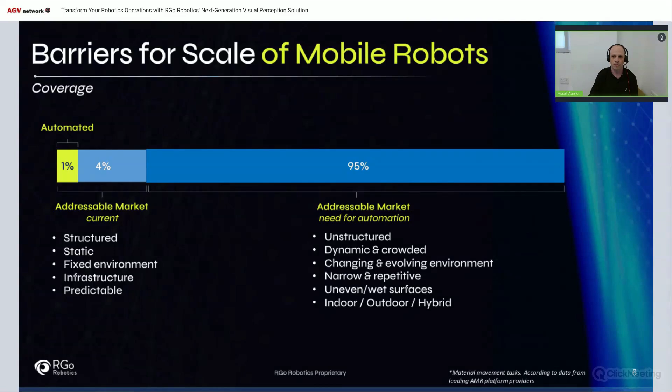And then you also add to that indoor, outdoor, and different surfaces, and you realize that the coverage of current systems is very limited. So the first problem we'll try to solve is coverage—making autonomous systems operate anywhere, anytime would unlock the first step into making this market addressable. With that, the second problem will be adaptability. Those two together basically build the coverage. Improving the availability of systems and improving their adaptability means they can now cover all the different sites.

The next challenges that we have are the commissioning times and the long time to market. So once you've solved the availability and coverage, as I said, you still need to talk about the scalability of the solution that you have—how easy it is to use it and how easy it is to deploy it.

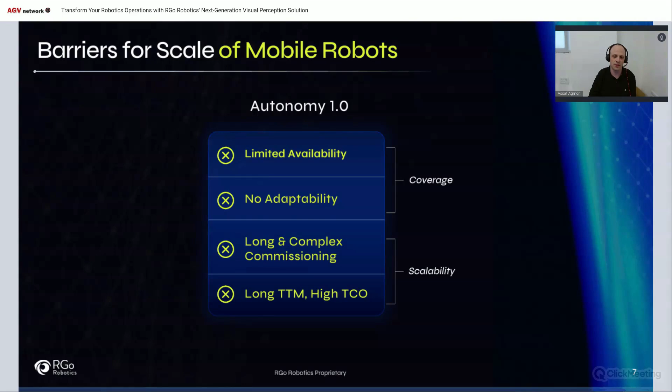And what RGo does, and we're going to go into the details today, is how do we move from autonomy 1.0 to autonomy 2.0? Autonomy that is available everywhere all the time, autonomy that can automatically adapt to changes without user intervention, without recommissioning, autonomy that is simple to deploy. You have tools that are simple, easy, intuitive, and don't require skills or expertise. Furthermore, you get fast time to market with lower TCO. It's RGo's mission statement to solve these problems and make this a reality, because solving all of these together would mean that autonomy would be able to scale and increase the market size eventually.

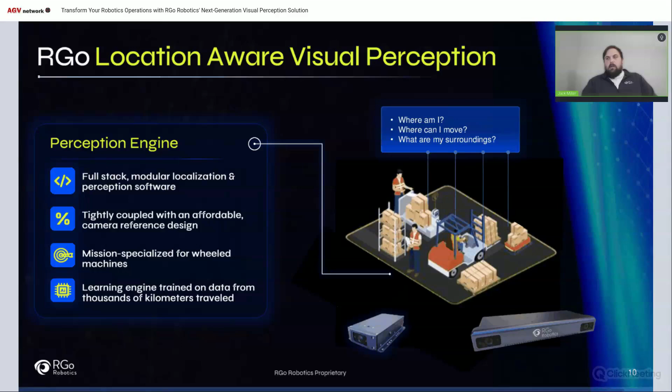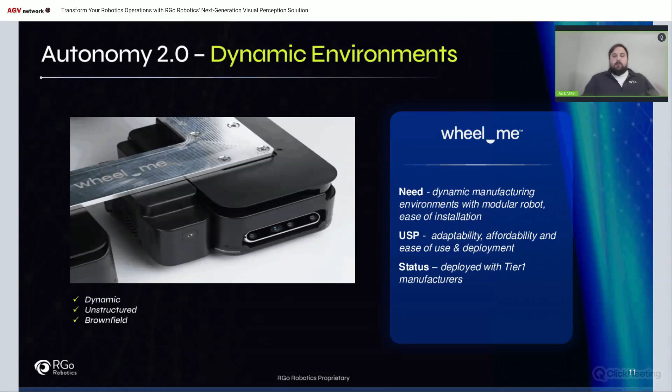Now we'll get into some of our partner companies and some of the major challenges that they face and what ultimately led them to RGo. WheelMe is a great partner to highlight for very dynamic and unstructured environments.

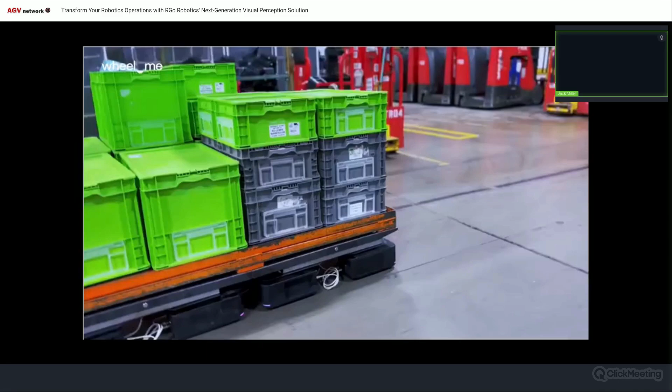Go back to video one there. Let's see here. See if you guys can see this for me.

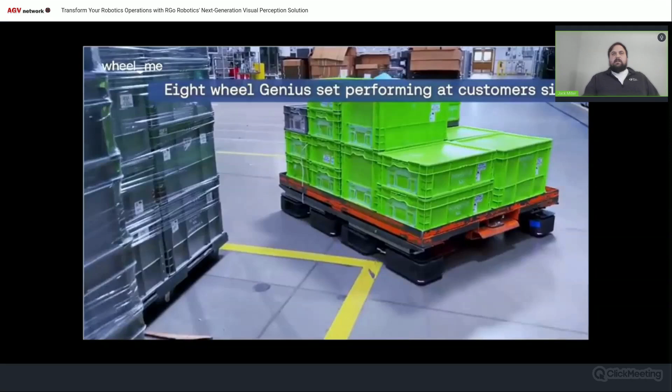All right, so this is a video of WheelMe in operation. I'll stop it right here, and you can see there's tons of pallets staged on the floor. There's wide open spaces with various product moving around. There's a lot of activity.

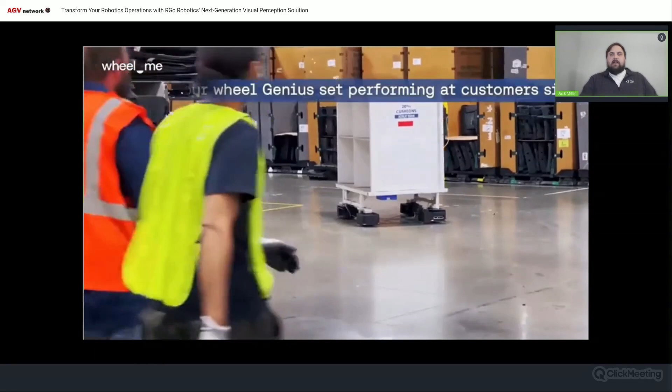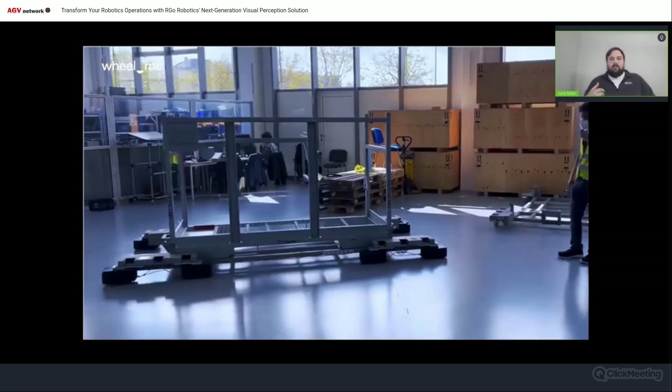In this particular area, we're going to have staging carts. Ultimately, from a WheelMe perspective, their platform has a lot of different sizes and shapes based on the specific use case, which means they need a very adaptable and easily configurable solution. WheelMe initially tried several open source options before selecting RGo. None of the open source options, LiDAR or VSLAM, were robust enough to manage the changing environments they were involved in, and that's a big part of their actual market space.

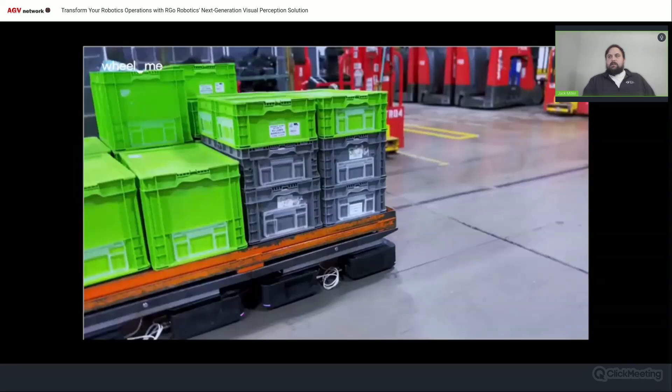We'll go back to presentation.

All right, so the next partner we'll talk on is Capra Robotics. Capra is another great example of very dynamic use cases. As a platform, their focus is intralogistics between buildings, where they're exposed to various lighting conditions, open unstructured spaces, changing temperatures and humidities, very dynamic adverse conditions. As such, they really needed a reliable and adaptable localization solution.

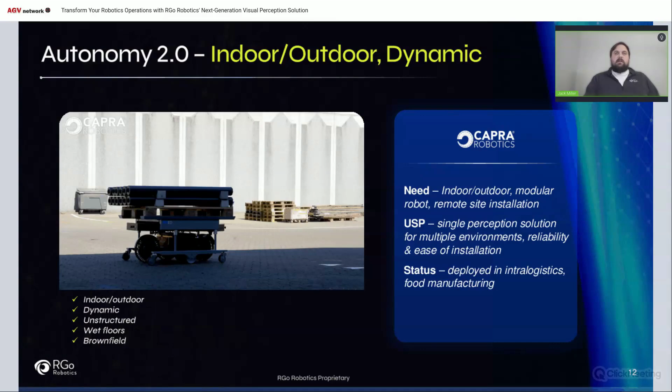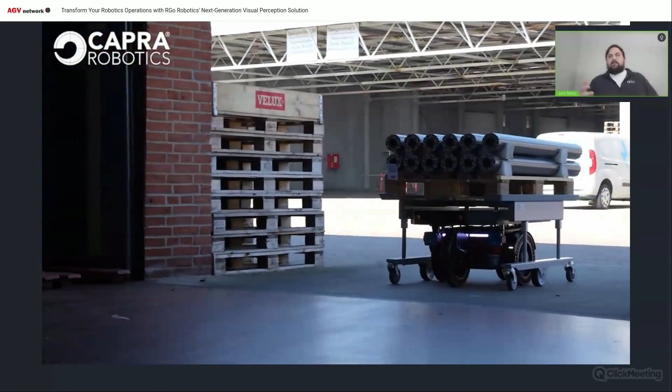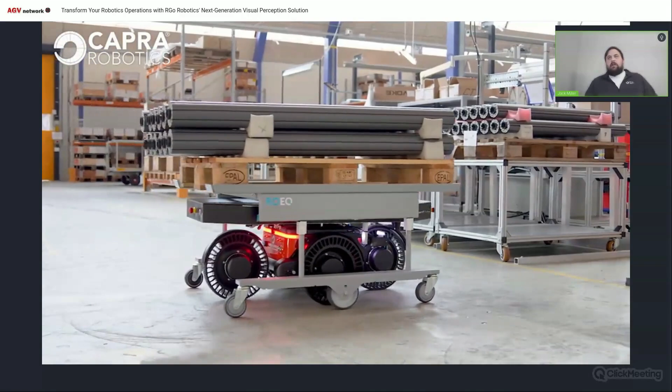So we'll go ahead and play the video here for Capra, and we'll go through some of their actual activities. You can see in this particular case, wide open area, changing environments, pallets stacked. There's cobblestone streets, and then it goes to flat areas, so vibration changes, lots of different infrastructure changes, especially what would normally challenge a 2D LiDAR. And we're able to maintain very precise, accurate, and repeatable positioning throughout all these dynamic changes.

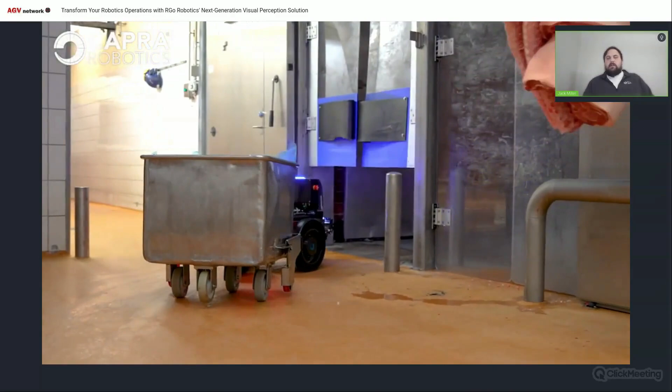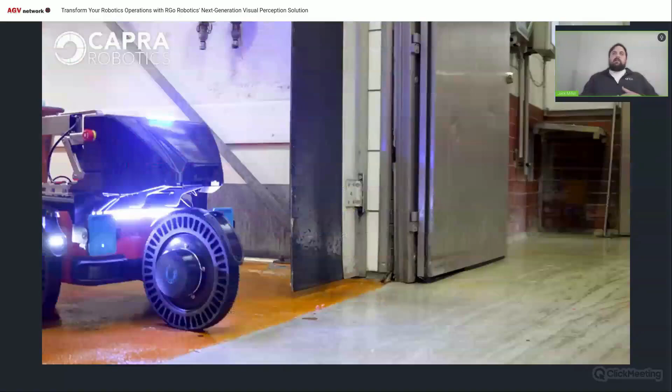Now we're getting into some more obscure and really torturous kind of environments: food processing. Think of this as, there's going to be temperature changes, the meat's got to stay cold, it's wet, there's meat hanging all over, moving on different hanging hooks. So very dynamic, very changing. But again, another environment where we're able to help Capra succeed.

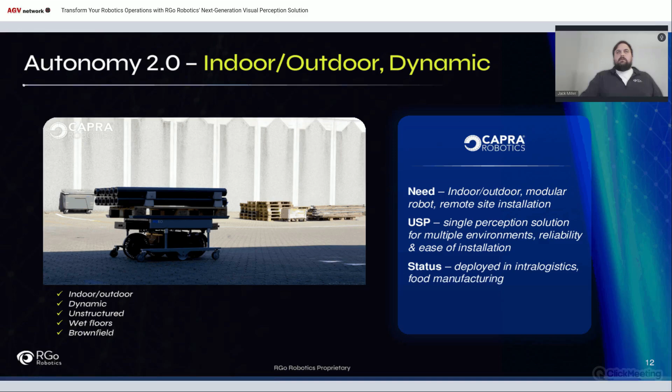All right, we'll go back to the presentation.

Okay, so the next partner we'll discuss is Onward Robotics. Onward is a good example of another major pain point for competing technologies, and that's repetitive narrow aisles. We discussed the dynamic situations with the previous two; now narrow repetitive aisles is really the second biggest pain point from a LiDAR perspective. Onward is a pick-to-light mobile robot that operates largely in e-commerce and distribution centers, so their environments are typically large warehouses, and all the racking looks the same.

Right, so not a whole lot of differentiation, especially from a LiDAR perspective. You would see pretty much the same iterative racking columns and boxes, but from a vision perspective, we're able to really hone in on the nuances between all the different edges and everything. So it really provides a much more robust solution.

And just to add on to that, Onward actually started with an open source LiDAR-based SLAM known as Cartographer. But they often ran into pose jump issues and lost pose issues, particularly while going down long, narrow aisles that look identical, in a grid format. So that's why they actually selected RGo, to adapt to that pose jumping issue and really understand where the robot is, no matter what aisle it's in.

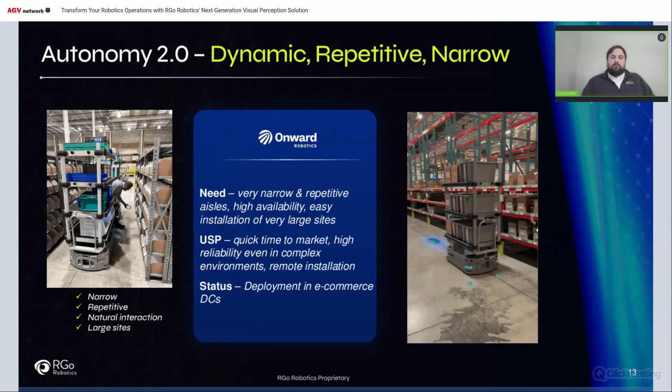All right, so the next industry we'll discuss is sortation robotics as well as infrastructure AGVs. These are two very different industries, but we've seen a lot of interest in the sortation robotic space particularly recently. We currently are partnered with a couple of OEMs in this space, and we actually have a few evaluations coming up for a few others.

But ultimately, what we've seen in this space is these robotics have, for a long time, navigated based off of little QR codes on the floor, which is its own type of infrastructure. And that's a pain to maintain, especially in operations, especially when you have hundreds of these robots moving around. Stickers peel up eventually. So we're seeing a particular need in this industry to adapt to an infrastructureless solution, and that's where we come in.

So again, these types of environments are going to be very repetitive, very narrow at times. We need to maintain tight precision and tight position accuracy, and dock to the right locations. So we're pretty excited about this industry right now. We think that we're bringing the right technology to the table.

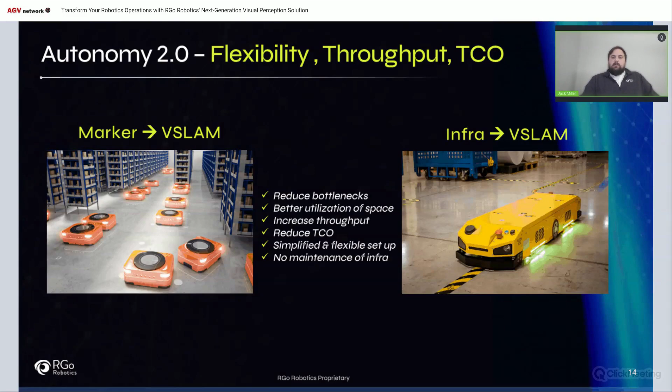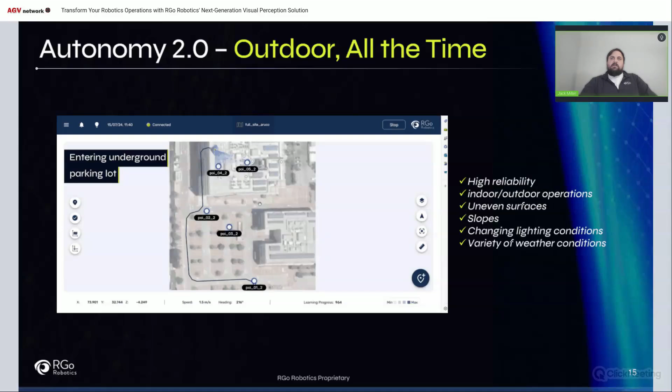And so the next element that we'll touch on is outdoor. So we are capable of indoor and outdoor, as we mentioned with Capra Robotics. I'll play a video here for you, but to set it up, this is actually our system attached to a car driving through a parking lot and into a parking garage, and going down a ramp into an underground parking garage.

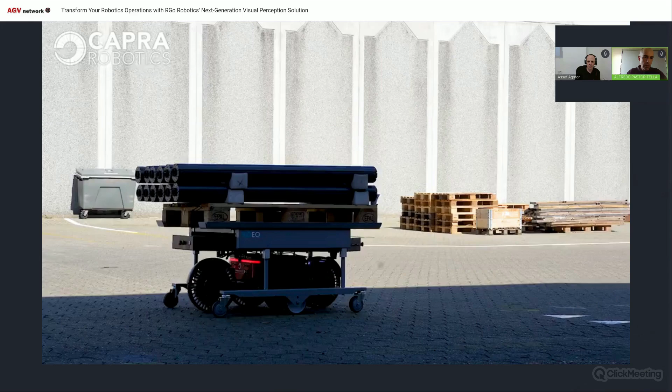Diving into site commissioning, this is our experience working with our customers and partners on scaling our deployed solution. As we scaled our deployments, we realized that the deployment itself becomes a bottleneck to selling more and eventually deploying successfully. A lot of it is because the commissioning process ends up taking a long time, creating risks for end customers. It's tedious and complex, requiring skilled personnel. There's a lot of site shutdowns, adaptations, infrastructure changes, and compromises that people have to make with current technologies. What we set out to do, and what you can definitely sense as an underlying tone in the industry, is that end customers are cautious and resistant to autonomy, and much of it is because of deployment.

In other industries, like consumer electronics, it's called the magic moment. For end customers who buy in and decide to splurge on automation and autonomy, they want to feel it just works. Then they see a solution that takes weeks to get set up, and how long it takes to scale up from 10 to 100. I just had one customer today saying, yeah, we could deploy 3 to 5, but when we got to 100, it became impossible.

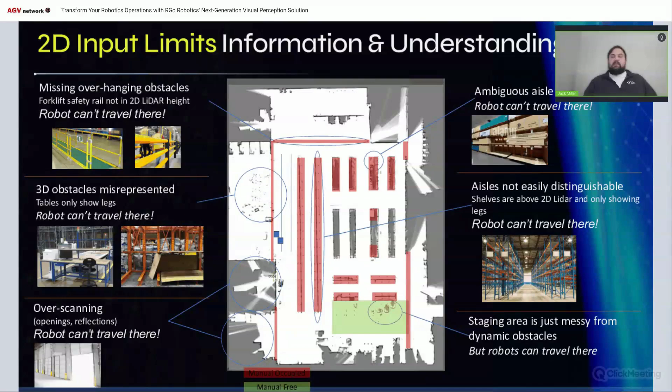So what is RGo doing about it? What is our approach? We've recently developed an intelligent map wizard that uses 3D data and semantic data to add valuable insights to the map immediately without the need of specific skill sets and long time frames to resolve. What we were discussing previously with 2D systems requires a lot of rework and a lot of effort and activity, and usually long deployment times.

Take out the inherent knowns that a deployment engineer has to keep in their brain and identify while they're scanning the environment, and make tedious notes on what needs to be taken out and what needs to be added in and where. Let alone actually stitching LiDAR maps together, which for anyone that's actually done it, it's a truly pain in the ass.

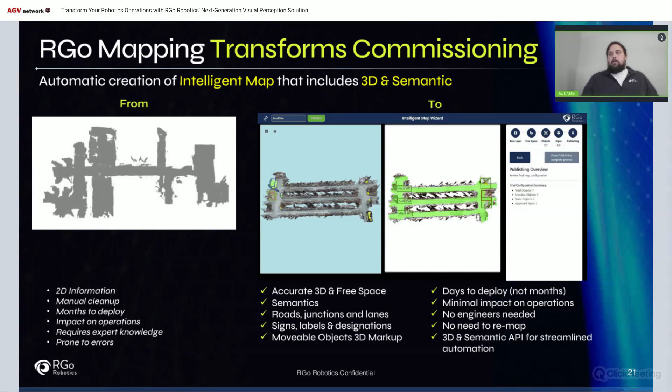But enough about that. We'll get into the actual map wizard that we developed. I think it's pretty cool. So we'll go ahead and jump into a video and show you guys what we're up to.

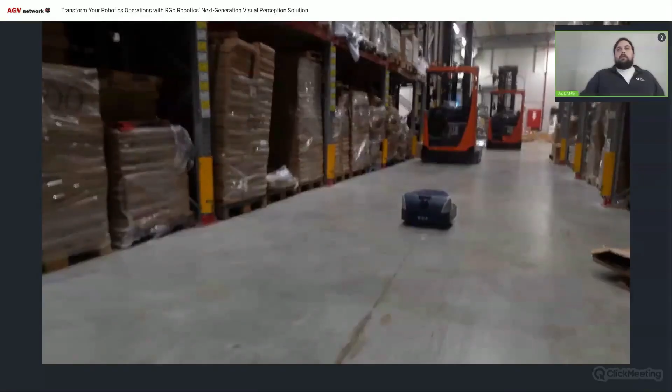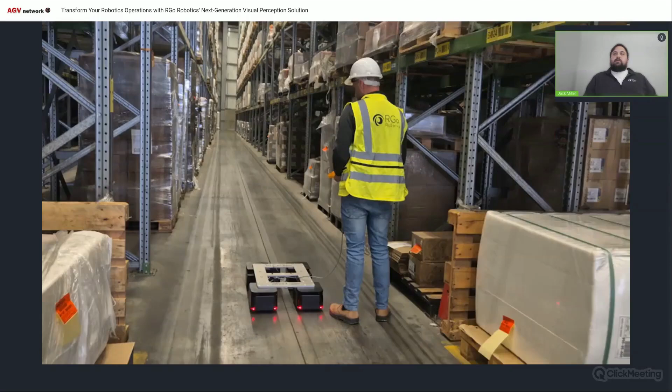All right, so right now we're just going through what would be a typical map on-site. That was one customer robot versus the real new customer robot, right? So mapping just involves manually driving the robot through the warehouse.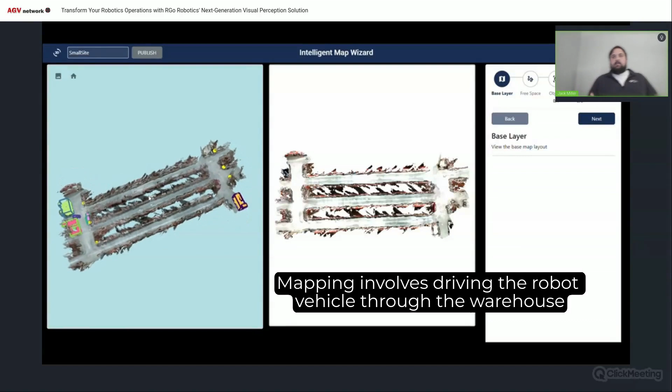And so from that mapping activity, we're able to create a three-dimensional reconstruction. We're able to then identify free space for the vehicle's travel. So you'll notice in the wizard here, it's a very sequential, step-by-step activity that leads the deployment engineer, or the technician, in a way that they're able to identify any of the potential objects or potential semantic data that's of particular importance, and either accept it or reject it.

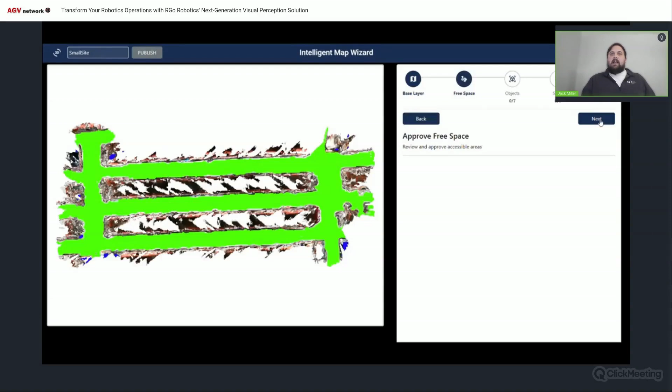So the first step here is accepting the free space as it is, right? And you just click next.

There's a cart that stays at the end of an aisle that doesn't belong there, and that's free space. There's another cart over at the end of this aisle, that's free space. A hand dolly, that's free space. And here is what appears to be a movable cart, right?

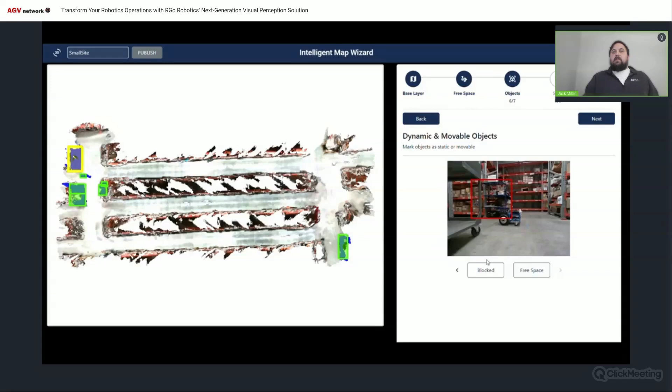But operationally, this particular cart belongs there. It might not spend 100% of its time there, but it might be 80 or 90%. So what's important is to maintain that it is not free space. Robots should never drive into that area, whether or not it's usable.

So that's where the user is able to mark it as blocked and then move on to the next stage. Once you've categorized your objects based off of how they impact your free space for path planning, now we move into more of the semantic data for understanding your actual environment.

In this case, we're reading signage, right? So at the end of each of the aisles, there's an aisle name and number: A1, A2, A3. And there's also 3 additional signs in the back: one for caution, one for danger, and one for no forklifts.

As you can see, the wizard just guides the user through to either approve or reject each of the semantic data that was captured, so that when your map is published, you're able to have useful and usable information for you and for your end customer.

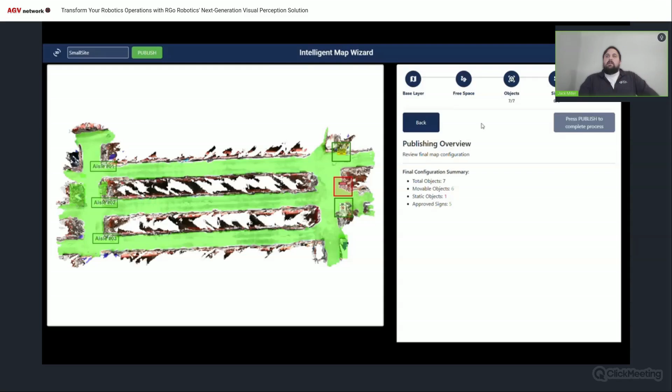So we'll go ahead and play this again. When you click next, it locks that all in, and you go to publish. And once you publish the map, close it.

And then you're able to align the map with the two-dimensional image and have a clean representation of what is usable space and what is your actual environment.

It might be a little hard to see in this image, but if you can see where the signs were in the wizard in the previous page, you can see that aisle 1 is labeled, aisle 2 is labeled, aisle 3 is labeled. We have the caution sign and the no forklift sign clearly labeled on the map.

Going back to my AutoGuide days and my MiR days, I can't tell you how useful this would have been whenever I was evaluating my 1 million square foot warehouse facilities, and the customer is telling me that a robot is having an issue in aisle K, and I have no way of knowing which one is aisle K just from looking at the map.

Yeah, you almost have to have your own key and then count the number of aisles over, starting from one end to the other. And no two facilities are the same. No two naming conventions are the same.

However, one thing you can pretty much always guarantee, particularly in large facilities, is that there's going to be column numbers and/or aisle signs, because that's how humans operate and that's how humans navigate through an environment. So that level of semantic data is almost always readily available and easy to process.

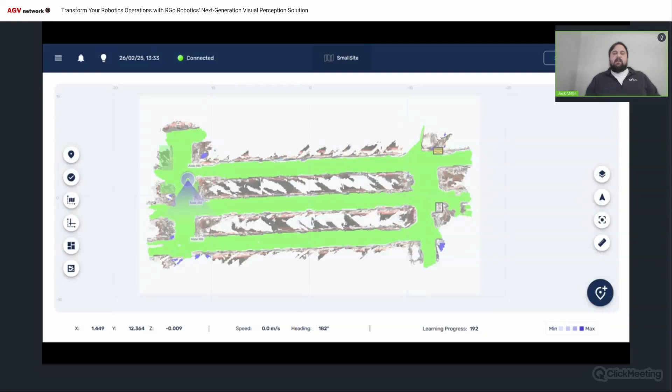That's why it's such a big part of improving not only the initial deployment, but also the maintaining of the deployment down the road and for operations. We're very big believers in this—this is where Asaf was talking about the different levels of AI and semantic understanding of our environment. These are some of the key points that we believe really unlock the next level of efficiency in operations. So, enough about that.

I'll show you, so you can see that the robot is able to drive along the map, and then after it's been categorized, classified, and the semantic data has been locked in, and the image has been aligned to that, then it's just a matter of starting up your own system and letting your robot move.

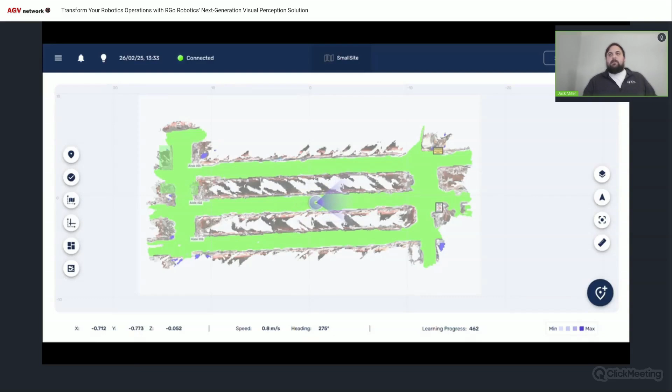So again, that's the mapping wizard we were just launching. We believe it's a big part of short and simple commissioning. It's going to help our partners have more efficient, shorter deployments with less skilled personnel doing deployments. Maybe eventually end customers are able to do deployments themselves, and actual deployment projects aren't even required. It all depends on how customers and the OEMs choose to handle that business.

Next area we'll discuss is time to market. One of the biggest things to address first is that our perception engine is a fully developed, ready to deploy product, and it's already deployed and scaling. It's not a kit or a framework that you build on top of with your own engineers—it's a product. As a product, we support 4 main client types from an API perspective: ROS1, ROS2, UDP, and C++.

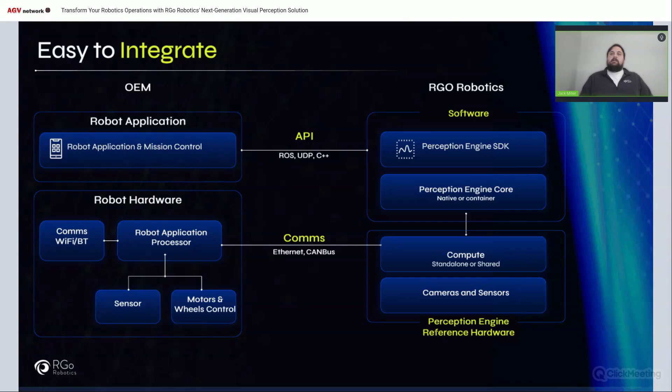Next slide. So now I'll just kind of walk through the typical partner's journey. And this all comes back to time to market, right?

For our system, the way it generally works is we have an introduction call. It's usually 1 or 2 calls where we hammer out some of the details, like how you're going to mount the mechanical fastening of the box, where it's going to be placed, what are the electrical requirements — just the immediate details for attaching any sensor to any robot and expecting something valuable from it.

So over those 1 or 2 calls, we then get into scheduling an evaluation. We schedule one week for the first integration, where we help integrate our system to your robot, and then we teach our documentation and user interface, and how to do the specific evaluation testing.

Then we give you 4 weeks on your own to do whatever you want from an evaluation perspective — check repeatability, check different environments, check dynamic changes to your environment, see how everything performs, check kidnapping, check lifting the robot, all sorts of different activities that are usually addressed. And there's usually an evaluation report, which generally rolls into a commercial agreement.

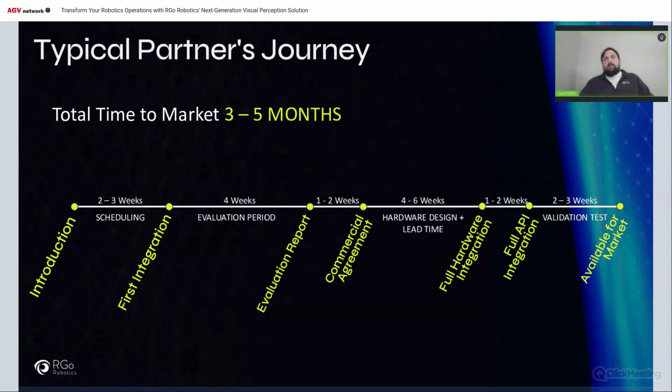So from a total cost of ownership perspective, we're talking about 3 to 5 months of integration timeline to have a proven product integrated right into your robot, versus if you decide to build it internally, which a lot of people do, a lot of people try. But what they quickly find is that they invest years of development time and millions of dollars developing a SLAM solution that still is years behind what's already been developed. So that's our spiel on time to market.

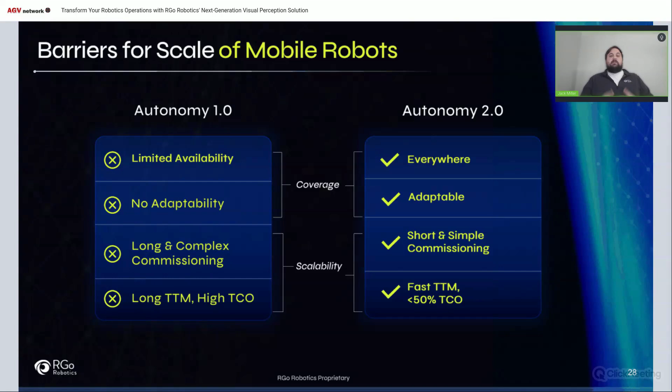So coming back around to the 4 major things that are the difference makers between Autonomy 2.0 and Autonomy 1.0: everywhere always, adaptable, short and simple commissioning, and fast time to market. These are the challenges that we seek to overcome for our partners.

We're also integrated with InOrbit, Meili, and Navitec Systems, and really appreciate those partnerships as well — they bring a certain level of fleet management to our operation. That's one of the great things about our secondary market, manual forklift tracking: we're able to incorporate live positional data for forklifts in a facility and feed that to a fleet manager, so that robotics vendors such as yourselves are able to understand where forklifts are and make more intelligent decisions from a traffic planning and path planning perspective. We really value those relationships, especially since they strive to achieve the VDA 5050 guidelines, which makes talking to and working with everyone a lot easier.

Yeah, I can take this one as well. I think calibration is a very interesting and very important topic. If we dive into the details, we're building basically an estimation system for localization. Any estimation system is limited by the accuracy of its measurement, which is limited by the accuracy of your calibration. So calibration is a crucial part of estimation and thus accuracy. We've actually spent a lot of time creating a specialized calibration pipeline that starts all the way from the production phase down to the online device. We try to do much of the calibration automated as much as possible, and not to fuss the robot manufacturer or the end user about it, especially not the end user.

So in that regard, the only calibration you need to do is to calibrate the robot once by turning it in place when you take it out of the box. That is automatically stored on the device - that's part of the commissioning. It takes maybe a minute, if I'm exaggerating. It's also initiated either by the UI or by the APIs, you can do it either way. That means the robot is now calibrated and ready to deploy. From there on, we also make more effort to constantly and continuously calibrate and recalibrate the sensors, not just camera to body, but also internally sensor to sensor, to make sure we get the most optimal performance. We spend a lot of effort on that. So that's a very good question.

I like it. Okay, Dan Jam asked - it's different now, but is it possible to semantically detect pallet location during the mapping process? Mapping process means you're focused on dynamic or static obstacles. Yes, we could detect pallets during the mapping process, but I just want to clarify - pallets also have a very common use case about pallet engagement, which is a different use case.